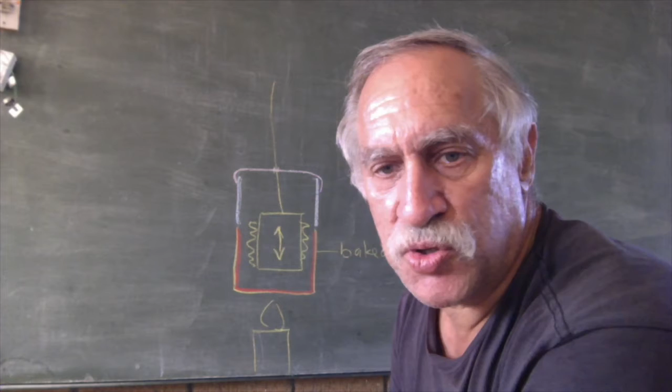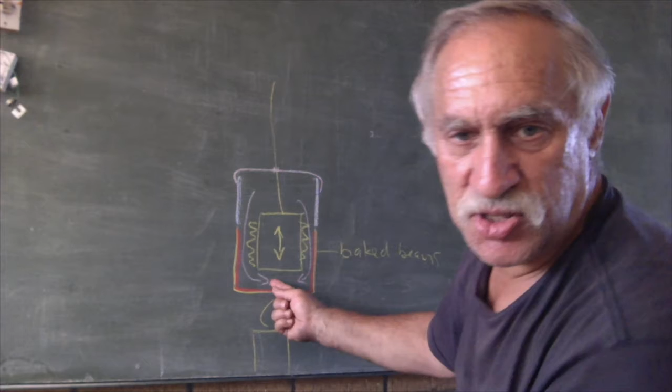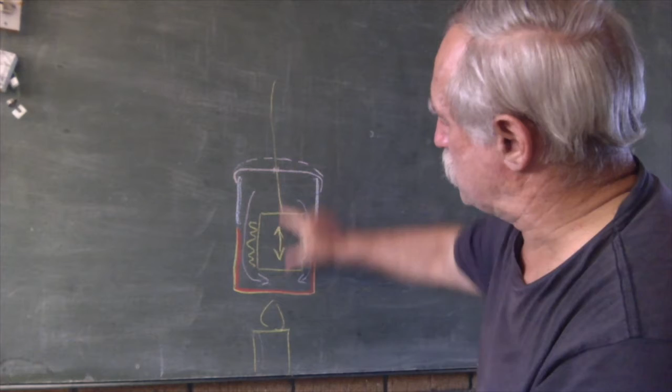So as this gets pulled up, all the air gets moved down, and then it gets heated. And when it gets heated, this balloon begins to bulge upwards like this. And then this moves up and down. So when this now moves down to the bottom, all the air that was hot here moves to the top

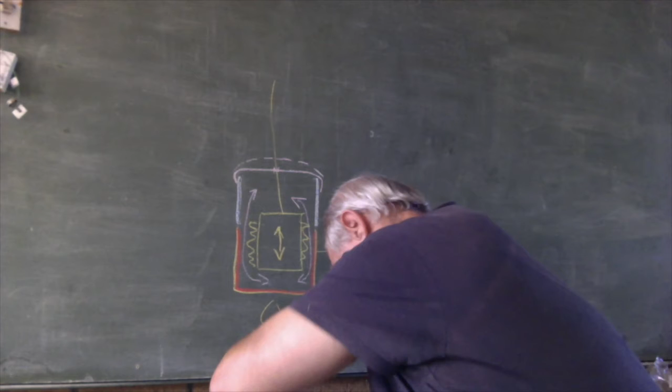where it gets cooled. So to help it cool, we put a piece of cloth around here, and so we just keep this cold. So we have a piece of cloth around here that is wet. So the air, when it gets moved to the top, cools, and then our balloon bulges down like this.

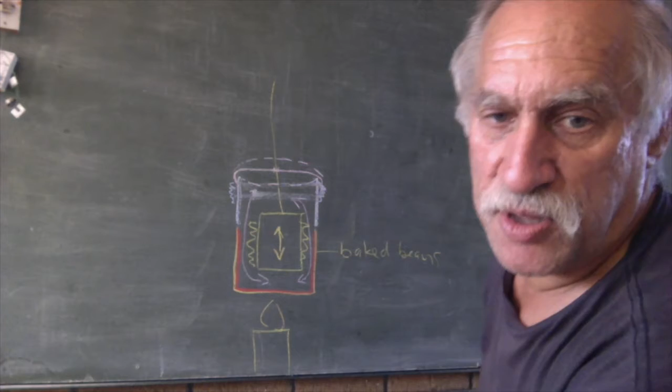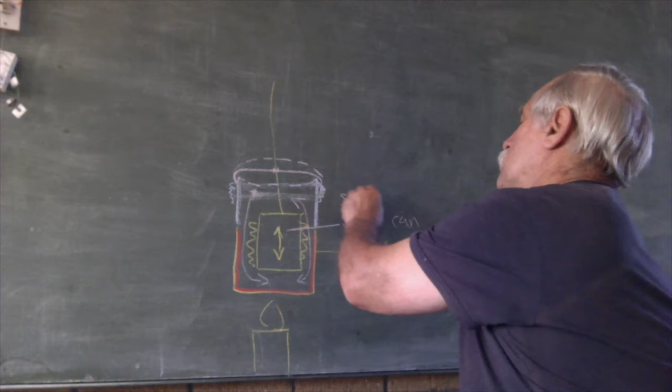So the air being moved by this displacer piston up and down, when the air gets moved to the top, it cools and the balloon goes down. And when this gets moved to the top, the air gets hot and the balloon goes up. So you could say the balloon kind of follows the displacer piston. This was just another small can, and I wrapped it in steel wool. And this is our displacer.

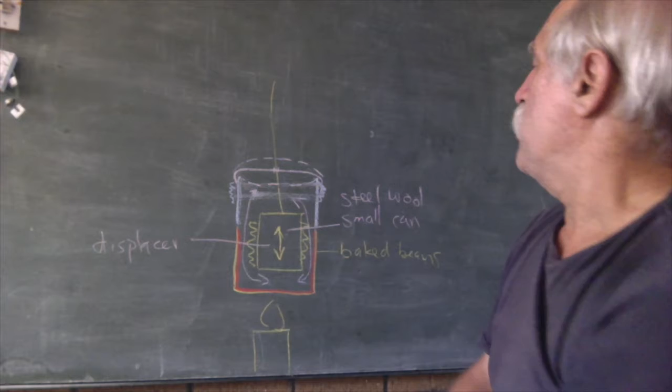It displaces the air. Then, I guess quite important to this was I had a small little tin glued to, this small little tin, thin aluminium tin, was glued to the balloon with super glue. And so this also moved up and down, and you could say that this was our power piston connecting rod.

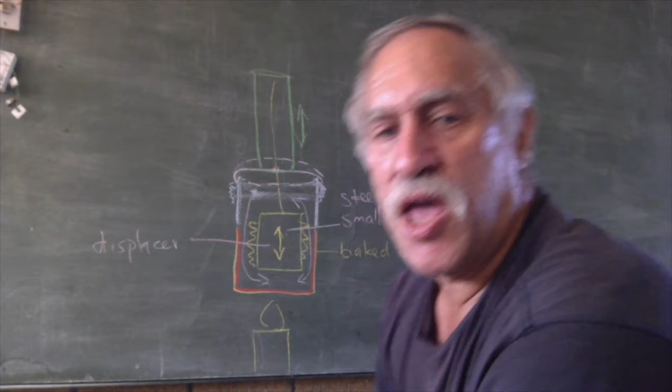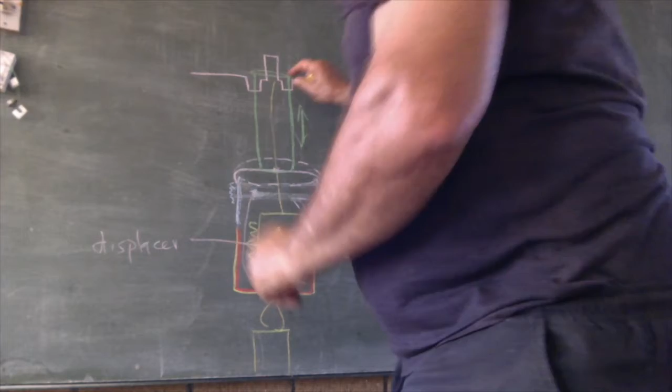And then this had a crank that went like this, and then there was another piece of the crank, then it had some more crank like this, and there, this power piston connecting rod, which was just another thin aluminium can, moves up and down. It turns this crank. Then we had a flywheel, and the flywheel turns and just keeps the momentum, just keeps everything going.

So this piece, which is the displacer connecting rod, just connects to the top there, goes all the way through, and I've just glued it to this can here. So this piece of the crank moves the displacer up and down, and this can here, as the can moves up and down, it's got a little hole in the side of the can that moves the crank around. And so the pushing of the balloon up and down turns the flywheel, and the flywheel turning moves the displacer up and down.

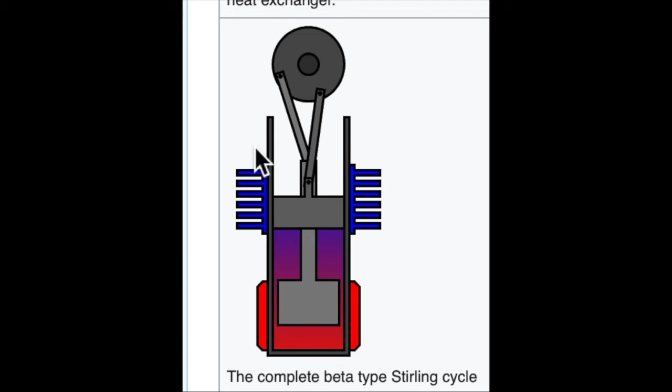And I'll show you from Wikipedia how this whole system works, just a quick little clip. And you will see how it works from Wikipedia the same way as I've described. So you've got your flywheel, your crank, your displacer connecting rod, your displacer. This is your power piston, which was just a balloon.

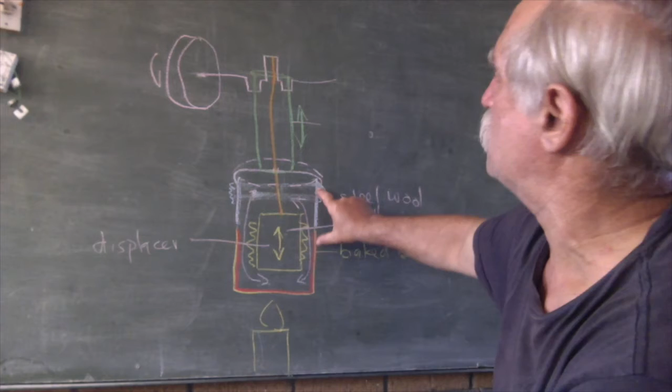So here, there was my 1 can, 2 cans, 3 cans. And then for my 4th can, I just had a bigger can. This was a jam can like this. And this jam can had a hole in it there and a hole in it there. And that was my last can, and that just held and supported everything.

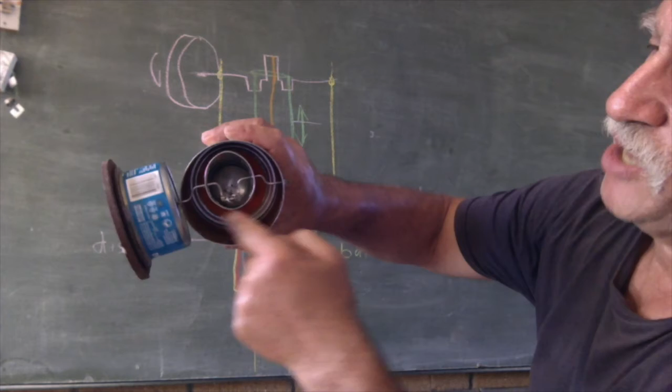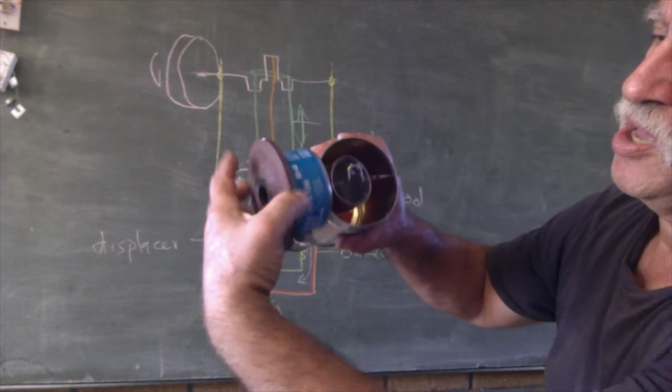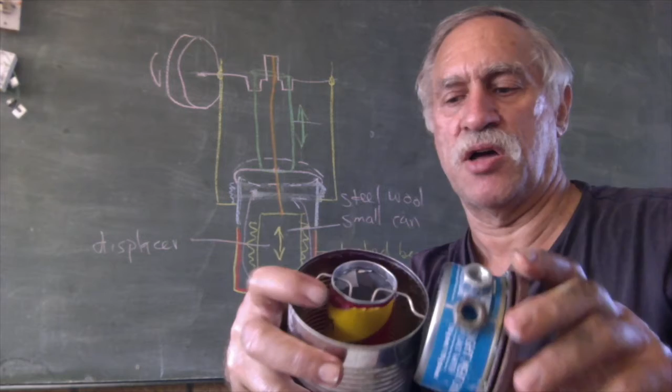So if you want to see it, there was the thin little can in the middle. You can see there's the crank. Here is our flywheel with a few weights. And here was a sanding disc just to give it a bit more weight. You will see that this moves up and down, which is our power piston connecting rod.

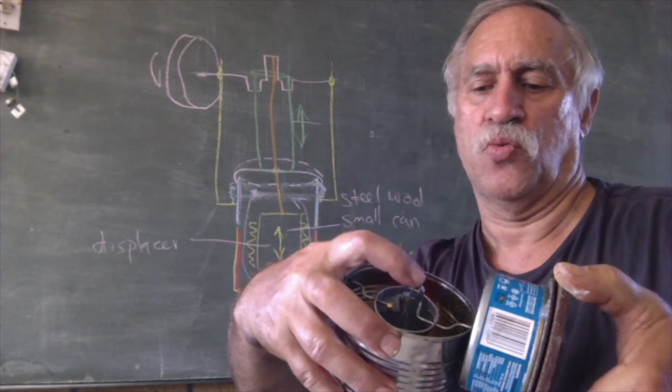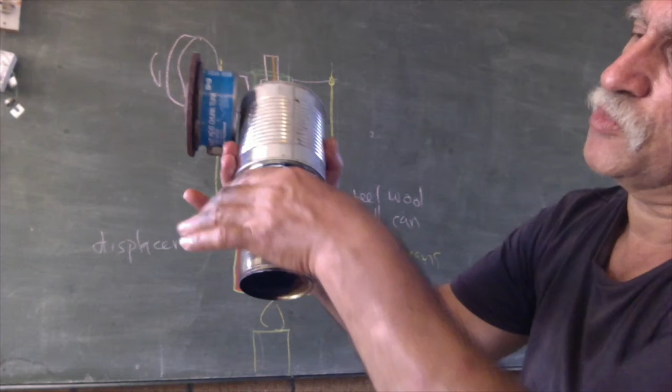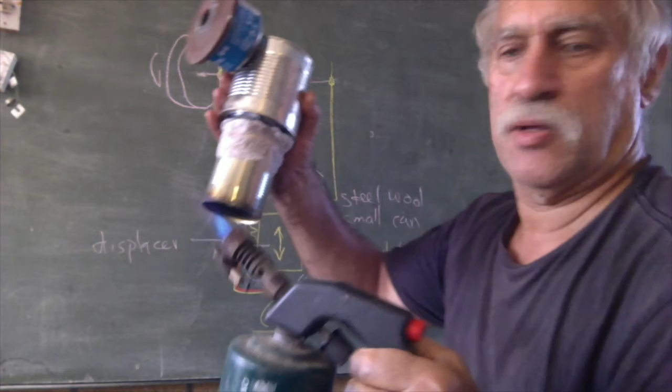And the crank moves it up and down. And you will see that the crank's got a little wire attached to it at the top there. That's the wire that moves the displacer up and down. Here's our bit of cold, it's just a bit of paper towel. And let's just stoke this up and see. So let's just stoke it up and see if we can